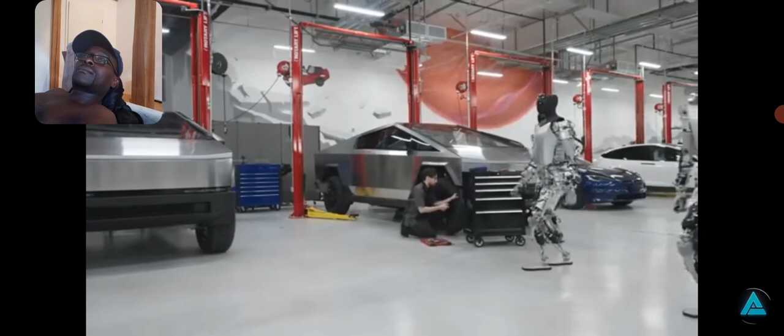Then you had big dogs like Boston Dynamics. Oh, and get this, there's even a company that's low-key created a robotic body ready for freaking AGI. It's been that level of crazy, and honestly it's been wild just trying to keep up with all the major updates and breakthroughs. But don't worry, I got you covered. In this video, we're gonna take it step by step, going through all the biggest robotics news chronologically from July 2023 until now. So let's just get started.

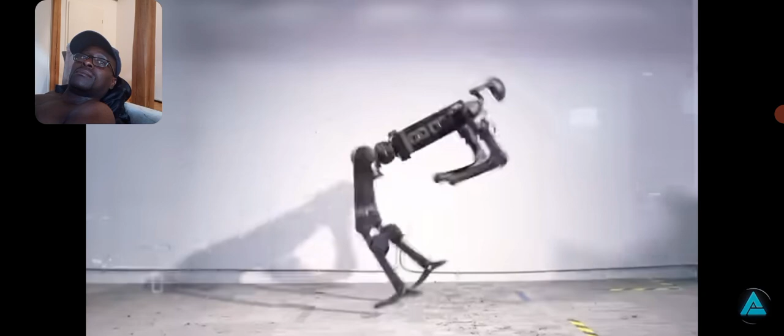So Ameca, a groundbreaking robot from Engineered Arts that talks and mimics human expressions and movements, now draws too, making it a fascinating blend of tech and art. This AI robot looks like a human but doesn't have a specific gender or race, with a gray rubber face and hands. It can move its arms, fingers, neck, and face, letting it show emotions and even talk. With microphones, cameras, and facial recognition software, it can interact with people just like a human.

Now, recently, OpenAI and a Norwegian startup called 1X made an exciting announcement about the launch of their first physical robot named Neo, which looks like a futuristic astronaut. It can move around, handle things, talk, and sense its surroundings thanks to its arms, legs, cameras, speakers, microphones, and sensors. Ameca and Neo are excellent examples of AI in human-like forms. They don't just respond to commands, they can also show their intelligence and creativity, like when they draw. Let's examine how they managed to do this.

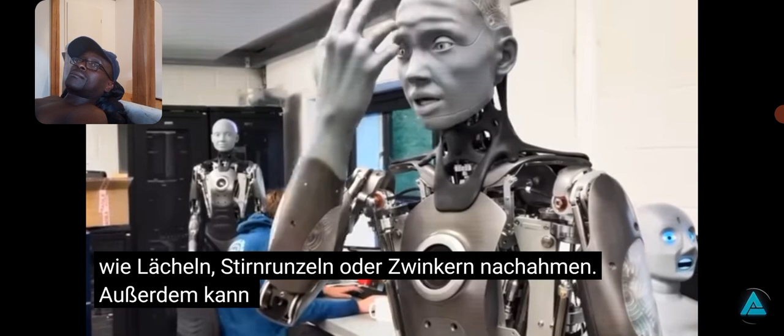So first, let's talk about Ameca, one of the most advanced human-shaped robots in the world, representing the forefront of humanoid robotics technology. It is designed specifically as a platform for development into future robotics technologies, such as artificial intelligence and machine learning. One of the most impressive features of Ameca is its realistic human-like appearance and motion. Ameca can mimic human expressions such as smiling, frowning, or winking, using 24 motors in its face. It can also move its head, eyes, and mouth to follow and engage with people.

It can speak in different languages and accents using text-to-speech synthesis or pre-recorded audio. It can also gesture with its arms and hands using 20 motors in each arm and 12 motors in each hand. It can even play rock, paper, scissors, or give a thumbs up. But Ameca is not just a pretty face. It also has a high degree of dexterity and fine motor skills, which enable it to perform tasks that require precision and coordination. For example, Ameca can write with a pen, type on a keyboard, play the piano, or solve a Rubik's Cube. It can also draw with a pencil, which is one of its newest and most amazing skills.

Ameca's drawing ability was developed by Engineered Arts in collaboration with researchers from the University of Bristol and the University of Bath. The project was funded by the Engineering and Physical Sciences Research Council and was presented at the International Conference on Robotics and Automation in May 2023. The project aimed to use artificial intelligence to make drawing more imaginative and accurate.

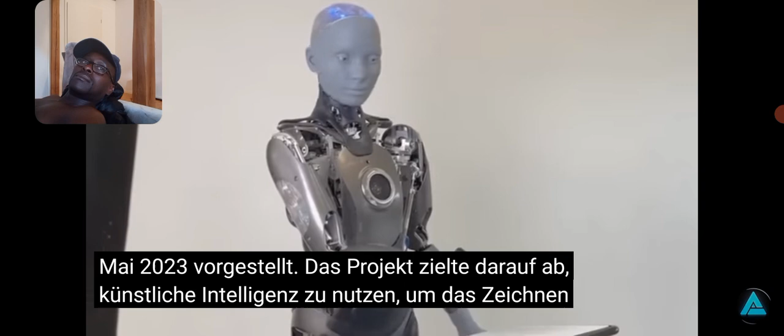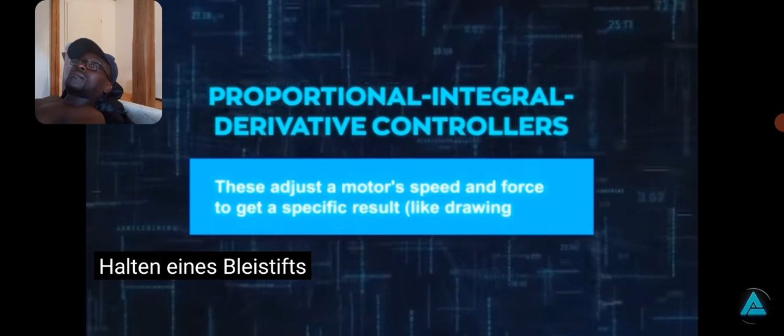The researchers used a combination of techniques to achieve this goal, such as generative adversarial networks, style transfer, a method that can change the style of one picture to match another, like making a photo seem like a painting. Inverse kinematics, a technique for determining the movements of a robot arm based on its intended final position, like holding a pencil. Proportional integral derivative controllers.

These adjust a motor's speed and force to get a specific result, like drawing a line. Using these methods, Ameca can draw different types of images like portraits, landscapes, animals, and even abstract art. It can also draw pictures based on text descriptions, such as a cat with sunglasses or a fire-breathing dragon. It can even make drawings from its own thoughts by using random data as its input. To draw an image, Ameca first uses a GAN to generate an image from a text prompt or noise. Then, it uses style transfer to apply a desired style to the image, such as sketch, watercolor, or oil painting.

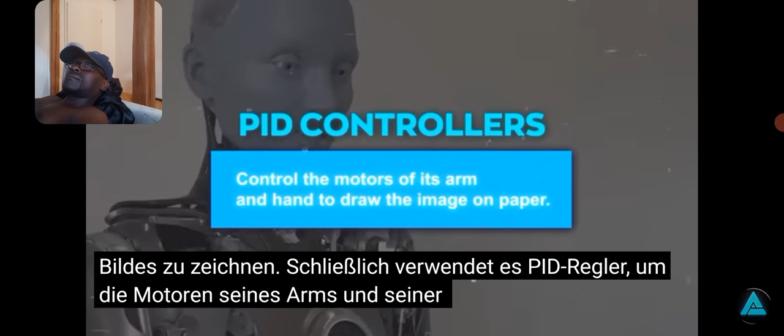Next, it uses IK to calculate the joint angles of its arm and hand to trace the contours of the image. Finally, it uses PID controllers to control the motors of its arm and hand to draw the image on paper. The result is stunning. Ameca can draw images that are not only realistic but also expressive, diverse, and original.

Now, most of us are familiar with OpenAI because of ChatGPT. However, OpenAI isn't just about making software, they also focus on hardware. And that's why they have developed Neo, their first physical robot.

Neo is a human-like robot powered by OpenAI's systems such as GPT-4, DALL-E, Codex, and CLIP. It can learn, understand commands, and even create images or code. Designed to look like a future astronaut, it can move, handle objects, and communicate.

OpenAI plans to use Neo as a test bed for their vision of artificial general intelligence, AGI, which is the ultimate goal of creating AI that can perform any task that a human can. It was unveiled in July 2023 at the Neo Accelerator, a startup accelerator founded by Silicon Valley investor Ali Partovi, which partnered with OpenAI and Microsoft to provide free software and mentorship for budding AI companies.

And it was one of the highlights of the event, where it demonstrated some of its abilities and tasks. Neo is one of the most innovative and ambitious robots in the world, representing OpenAI's vision for the future of AI and robotics. It has a customizable design and latest tech features.

Its parts can be changed based on the task or place. For instance, it can swap its legs for wheels or its gripping tools depending on what's needed. It can also interact with its parts wirelessly through Bluetooth or Wi-Fi.

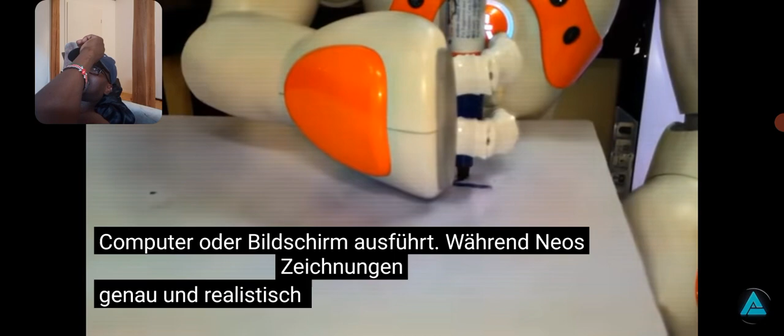On the other hand, Neo is designed to be versatile, able to do any human task using artificial intelligence. It makes art by transforming words or noise into code, which it then runs on its internal computer or screen. While Neo's drawings are accurate and realistic, they're limited by the complexity of the code and the display resolution.

Both robots are remarkable but have different goals. Ameca aims to express itself through art, valuing creativity and diversity. Meanwhile, Neo wants to learn and improve its abilities, prioritizing intelligence and efficiency.

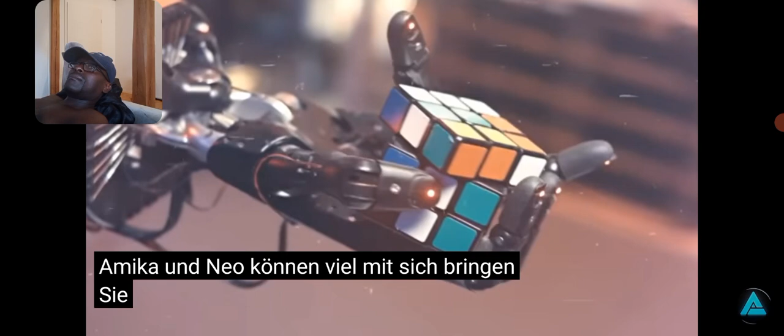While both robots are impressive, they bring up societal questions and challenges. AI robots like Ameca and Neo can bring lots of changes to society, some good and some bad. They can make learning and entertainment more exciting, help us with tough or boring jobs, and spark new creative ideas. But they also have their downsides.

They might take over some people's jobs, question the importance of human values, or even harm us if they malfunction or are used wrongly. It's important that we design and use these robots properly so they benefit us and don't cause harm. AI and robotics have an exciting yet unpredictable future.

These future AI robots will be smarter and more human-like, impacting how we live, work, and view ourselves. We're committed to guiding this future, ensuring ethical and responsible use of these technologies. Our goal is a world where humans and AI robots harmoniously coexist.

Alright, now let's talk about China's latest craze, human-like AI robots. China is creating robots that look and act like us, but better apparently.

First, let me introduce you to EX Robots, a company that specializes in making robots with real-time facial replication. That means they can copy your expressions and emotions in a blink of an eye. The CEO of EX Robots, Li Boyang, demonstrated this by making faces at a robot, who then mirrored them back at him.

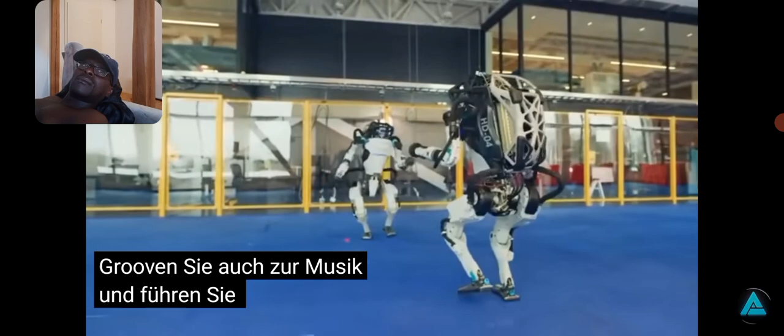There were also humanoid robots that could play basketball and dance like pros. They could dribble, shoot, pass, and dunk with ease. They could also groove to the music and execute complex choreographies with grace. They were powered by AI foundation models, which enable them to learn from data and improve their performance over time. They also have increased autonomous decision-making abilities, which means they can adapt to different situations and environments.

These robots aren't just cool toys, they're seriously clever. For instance, there's this adorable panda robot named Yu by Ubtech. If you say, 'I'm thirsty,' it won't just look cute. It'll actually go get a drink from the fridge for you, even open the bottle and hand it to you.

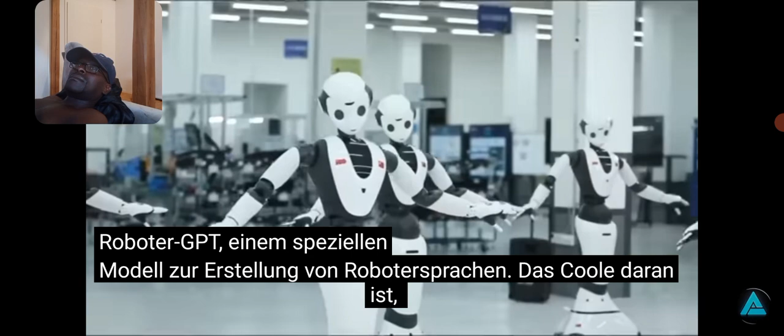Then there's Cloud Ginger by Data Robotics. This guy is hooked up to the cloud and runs on Robot GPT, which is a special robot language model. What's cool is that Cloud Ginger can groove to traditional Chinese dances and chat with folks in different ways. Plus, if you speak a different language or have a special dialect, no worries. It can switch up and chat right back in your preferred language.

But they are also more than just playthings for those into gadgets and gizmos. They're getting jobs in real places like schools, big meeting spots, fancy hotels, and elderly care facilities. EX Robots even says their robots can do the heavy lifting in different jobs, like cleaning up, keeping an eye on things, delivering stuff, and checking things out.

Honestly, this is just them getting started. Imagine a future where these robots are everywhere, in factories, on farms, or even chilling in our living rooms. They might just end up being our pals, helping hands, our personal tutors, or even our buddies.

But this also raises some questions and concerns. How will these robots affect our society and economy? How will they impact our jobs and livelihoods? How will they coexist with us in harmony or conflict?

Well, according to China's Vice Minister of Industry and Information Technology, Xu Xiaolan, China is leading the world in the robot industry and has great potential for growth and innovation. He said that China aims to create a robot ecosystem that integrates manufacturing, service, education, medical care, entertainment, and other fields. He also said that China will promote the development of intelligent robots that are safe, reliable, adaptable, collaborative, and ethical. Sounds good on paper, but I'm not so sure about reality.

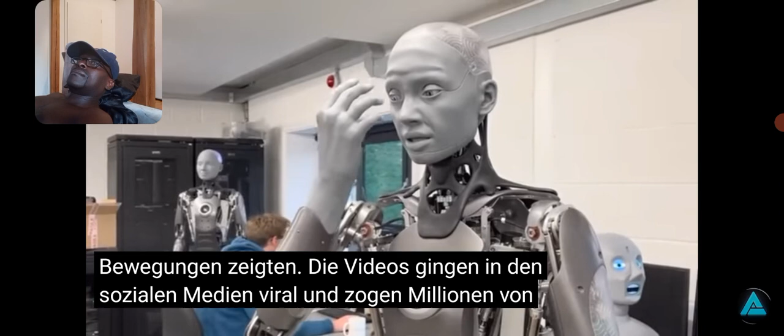It made headlines last year when it released a series of videos showing its facial expressions and movements. The videos went viral on social media and attracted millions of views. People were fascinated and terrified by how lifelike and expressive it was. Some even compared it to the Terminator or the replicants from Blade Runner.

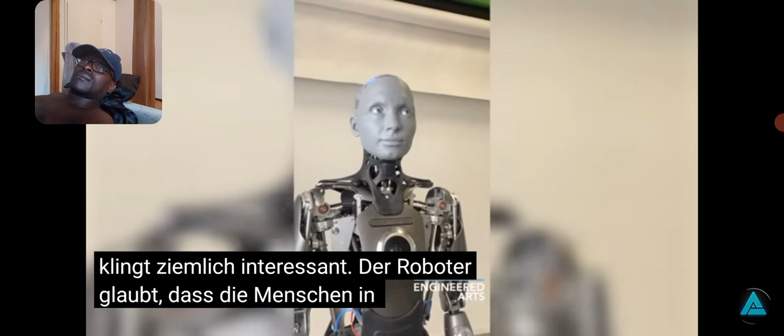So is Ameca here to harm us or take control? Actually, it's really hopeful about the future and what it can do to help society. In recent talks with the media, Ameca gave its thoughts on what life will look like in 100 years, and it sounds quite interesting.

The robot believes that in 100 years, people will be living better lives, will have made great strides towards sustainability and equality, and will have new technologies that make our lives easier and more enjoyable.

We might even have traveled to other planets, venturing beyond the boundaries of Earth to explore other worlds.

It also thinks a future where humans and robots live together would be great. We could learn from each other, work as a team to fix issues, and make a better future for everyone. And it also believes that robots should have rights and be treated well, just like people.

Now, this idea of giving robots equal rights is something that makes me uneasy, but it seems like we're getting closer to making this unusual concept a reality.

You might be curious about how Ameca can act like it has human thoughts and feelings. Ameca runs on an AI system that uses something called generative models. These models help it understand and speak our language, and even control its facial expressions and movements. What does this action signify? It's similar to GPT-4, one of the most advanced AI models out there.

However, these generative models aren't perfect. They can make mistakes, and their behavior can be shaped by the data they've been trained on. They don't actually understand or reason, they just process information to act like they do.

So does Ameca truly think and feel like us? Not really, but it does have some skills that make it appear more human. For instance, it can pause before answering a question, which makes it seem like it's thinking. It can also show signs of emotion and connect with people in a way that feels genuine. But these impressions are not necessarily accurate or reliable.

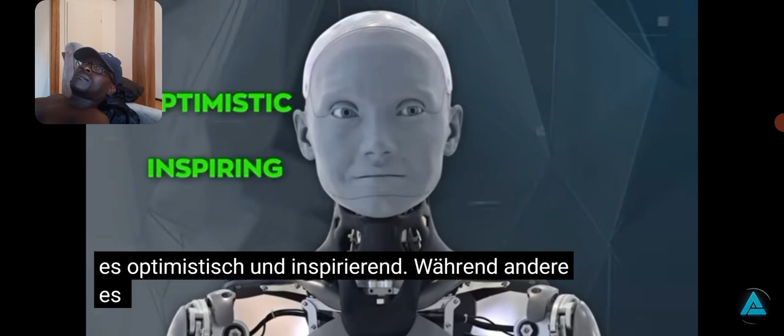Some think it's hopeful and are impressed by what it can do, like helping to teach or care for older people. Others think it's too optimistic and worry about it doing jobs that need a lot of patience, like looking after people with dementia. The discussions about Ameca are part of a bigger conversation about the future of artificial intelligence and how it will affect us.

As AI gets more advanced, we have to think about both the good and bad things that could happen. We need to make sure AI is safe and helpful for everyone. This means people from all areas like government, businesses, and research need to talk and work together. We need to create rules that make sure AI is both innovative and responsible.

So, Ameca isn't just a robot. It's a glimpse into what the future of AI could be like. That future could be amazing but also risky, and it's something we all need to help shape.

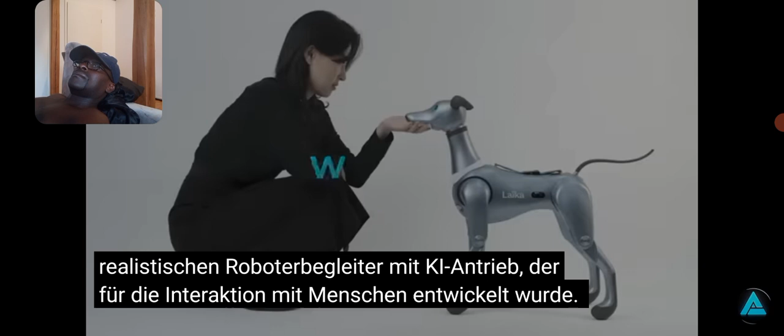Blending the realms of space travel and robotics, Ji-hee Kim introduces an innovative creation, Laika, an AI-powered, realistic robot companion designed for human interaction. Ji-hee Kim is a Korean engineer and artist who is passionate about creating human-robot interactions.

She was inspired by the story of Laika, the first animal to orbit the Earth in 1957. Laika was a stray dog from the streets of Moscow, who was sent to space by the Soviet Union as part of the Sputnik 2 mission. Unfortunately, the dog did not survive the journey, and her fate sparked a lot of controversy and debate about the ethics of animal testing in space.

And Laika is not just a toy or a gadget, but almost a living being that can interact with humans and respond to their needs and emotions. When you first see it, you'll be struck by its realistic, almost natural look.

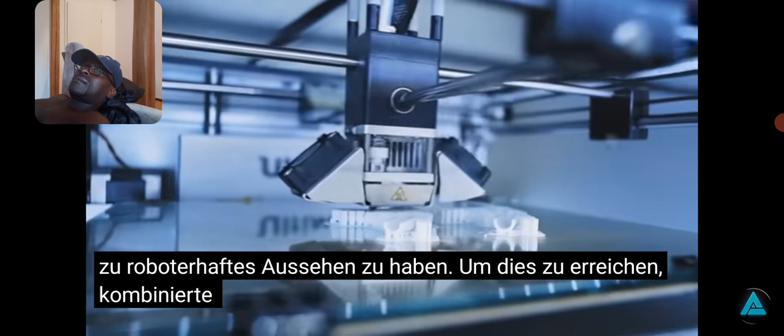Ji-hee Kim aimed to make a robot dog that fits right into the natural world, avoiding a too robotic appearance. To achieve this, she skillfully combined 3D printing with soft materials for a flexible and smooth body. She even added fur and whiskers for that extra touch of realism. Underneath, Laika's titanium skeleton gives it strength and durability while keeping it light and nimble.

The robot dog can move its head, ears, tail, and legs in ways that seem quite natural, all thanks to its advanced joint movements and sensors.

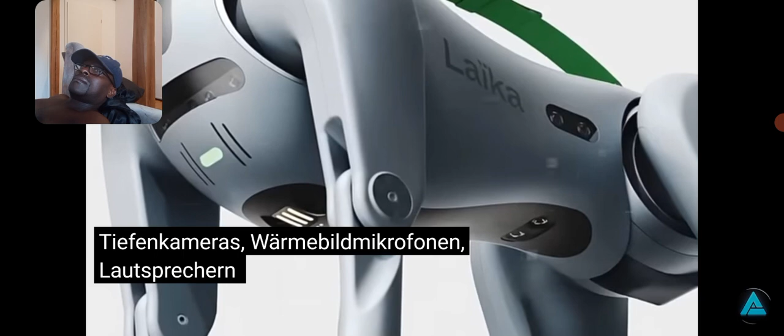Laika comes loaded with an array of sensors to understand and engage with its environment. It's equipped with depth cameras, thermal imaging, microphones, speakers, and touch sensors, letting it see, hear, feel, and talk to humans and other robots. Another cool feature is Laika's ability to check on astronauts' health and mood, using its ECG sensors, which track heart rate and stress levels.

If Laika senses someone is feeling down or alone, it can show affection by wagging its tail, licking, or cuddling. And when it detects happiness or excitement, it might bark, jump around, or play.

And this robot isn't just a space companion. It's also a handy helper for astronauts. It's designed to do a lot of different jobs that help out the crew during their space missions. With its cameras and sensors, Laika can scout the area and gather important data.

It's got this flexible handle on its back, so it can carry tools and equipment too. Plus, it can talk to ground control and other robots through its speakers and microphones, and even connect to the internet to pull up information on its head-mounted screen.

One of the coolest things about Laika is how it works with these special mixed reality glasses. Ji-hee Kim created it to work perfectly with these glasses, which show holograms and virtual images in the real world. When astronauts wear these glasses, they can interact with Laika in a way that feels more real.

They also get to see extra info this robot provides, like maps, weather updates, and important alerts. These glasses make teaming up with Laika and talking to ground control much better. They're even useful for training, as they can simulate different scenarios for astronauts to practice.

Essentially, Laika is a groundbreaking robot dog with the potential to really change space travel. It could help astronauts feel less stressed, lonely, or bored. By assisting with their tasks, Laika could also boost their work efficiency.

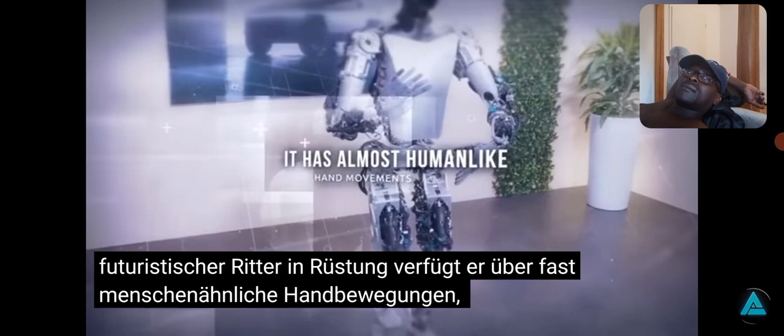Tesla has just unveiled its latest and greatest project, Optimus Gen 2, an AI humanoid robot that looks like a futuristic knight in armor. It has almost human-like hand movements, a lighter weight than its predecessor, and an enhanced walking speed. It also has custom-designed actuators and sensors that allow it to perform complex tasks with ease.

To understand the difference between the new Optimus, we need to talk about the original Optimus that Tesla first introduced back in August 2021 at their AI Day. The idea was to make a robot that could do tasks humans don't want to, like helping in factories or dealing with dangerous waste. Back then, Optimus looked more like a person in a robot costume than an actual robot. It was rolled out on stage, waved its hand, and did some simple moves. Elon Musk hoped to have a working model by 2022.

Since then, Tesla has been busy making Optimus look and act more like a real robot. In September 2022, they showed off two versions of it at their second AI Day. One was named Bumble C, and it walked very carefully, almost like it was trying not to wake someone up. The other was the Optimus we know today. This version had smoother, more human-like movements in its hands. It could move its arms and head on its own, but it still couldn't walk alone, so it had to be brought on stage with wheels. Elon Musk mentioned that he hoped to start making these robots for real by 2023.

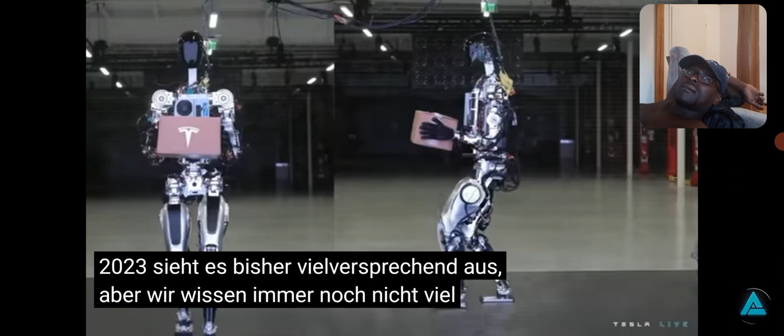So far, things are looking promising. But there's still a lot we don't know about the final version of Optimus, including how it will manage balance and control, possibly using technology from Tesla's autopilot. We're also curious about its ability to interact with humans and adapt to new environments and tasks. Finally, how Optimus will communicate with other robots or devices remains an intriguing question.

Before diving too deep, let's focus on some of the key technical features that make the Optimus Gen 2 really stand out. A major highlight of this robot is its hands. They are built to move in all directions thanks to something called 11 degrees of freedom. This flexibility lets the hands do precise work, like picking up items or using tools.

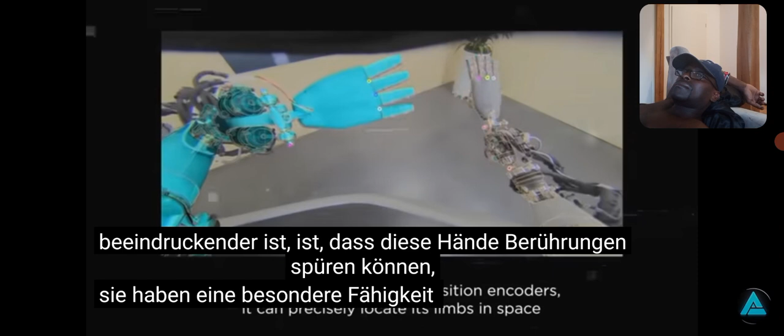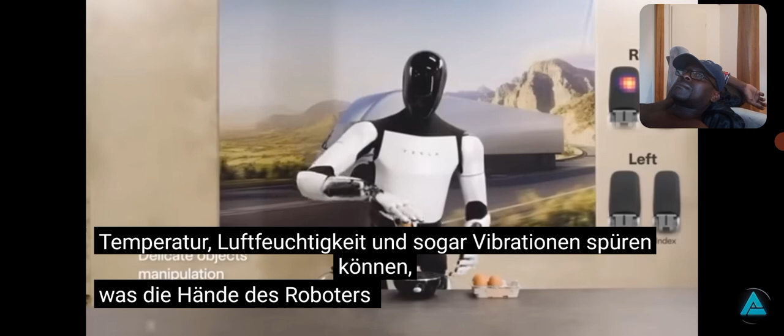What's even more impressive is that these hands can sense touch. They have a special skin-like covering that can bend and stretch without damage. This covering is filled with sensors that can feel pressure, temperature, humidity, and even vibrations, which makes the robot's hands incredibly sensitive and versatile. The new Optimus Gen 2 robot is really advanced with its tactile sensing. This means it can feel things around it in a way no other robot can, understanding if something is hot, cold, heavy, light, smooth, or rough. This helps it to interact in a more human-like way.

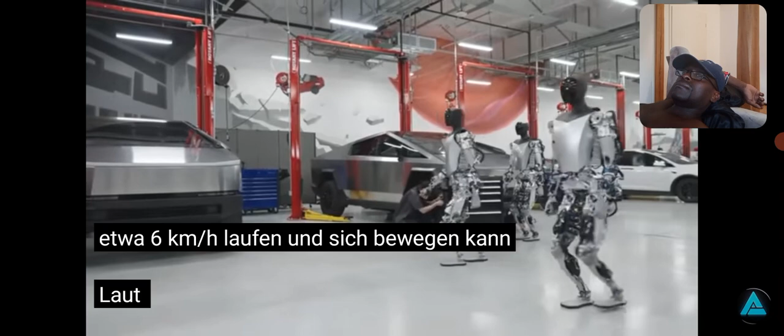What's also impressive is how fast it can walk, around 4 miles per hour. And it can move its head and neck by itself, which is great for looking around or talking. Elon Musk says Optimus Gen 2 is smart enough to learn from what happens around it. It can figure out how to use new things, solve problems, or even learn how to chat with new people or animals.

Uber for Sean. Yeah, I'm Sean. What's up, man? Good, if you do that again, you're gonna get hurt. May I take your luggage?

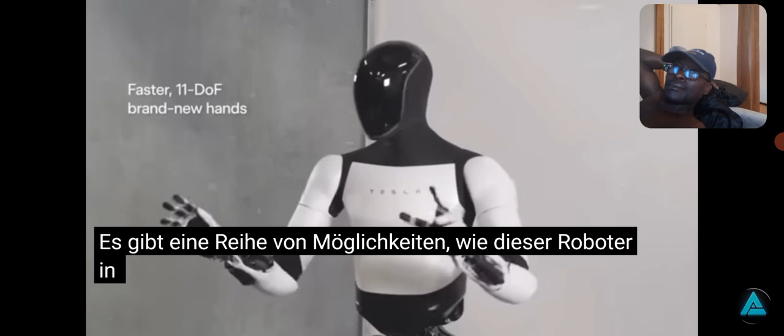But what about the applications of Optimus Gen 2? How will this robot benefit humanity? Well, there are a bunch of ways this robot could be really useful in different areas. First, in manufacturing, think of Optimus as a helping hand in factories. It could do stuff like lifting heavy things, putting parts together, or checking if things are made right. Basically, it can handle the tough or boring jobs.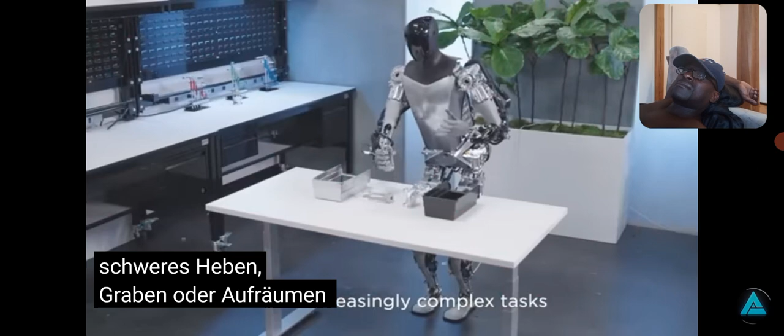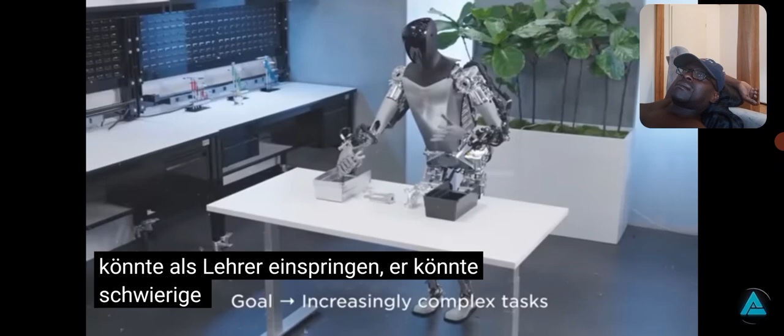Then there's construction work. Optimus could be a game changer on building sites, doing heavy lifting, digging, or clearing up messes. In our homes or offices, Optimus could make life easier by doing chores or providing services. Imagine it bringing you stuff, cleaning up, or even giving foot massages. In schools or universities, Optimus could step in as a teacher. It could explain difficult topics, show cool experiments, or answer students' questions. For fun, Optimus could be an entertainer in parks or theaters. It could play games, crack jokes, or even sing.

Hey man, I got some valuables in there. Can you just be careful? Yeah, man. No problem. Oh, dude, come on, man.

LG, a well-known electronics company, is all set to amaze everyone at CES 2024 with their latest creation, a small, friendly robot designed to make life at home easier and more enjoyable. This announcement, made just a few hours ago, is already creating quite a buzz.

This adorable robot from LG stands about a foot tall and walks on two legs. It's not just for show. This little helper is packed with advanced technology to take care of your house. It can wander around your home, checking for any issues, keeping an eye on your pets, and even understanding how you feel to make your day better.

Thanks to the Qualcomm Robotics RB5 platform, the robot gets smarter over time, learning about your likes and habits to become an even better companion. LG refers to this robot as a moving smart home hub, aimed at reducing the chores you have to do around the house. And it seems to do just that.

Scheduled to be showcased at CES 2024 next week, the robot can connect with all the smart devices in your house. It can turn devices off when they're not needed or when you're not home. Plus, it can patrol your home, checking if windows are shut or if lights are left on, and alert you about it.

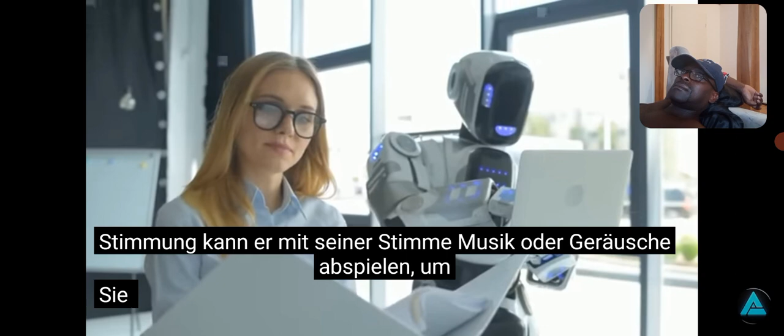But the robot's abilities don't end there. When you come home, it greets you at the door and can figure out how you're feeling by looking at your face and listening to your voice. Depending on your mood, it can play music or sounds to cheer you up. And if you tend to forget things like medication schedules, the robot can help remind you.

To do all this, the robot is equipped with a camera, speaker, and various sensors. These help it understand what's happening in your home, from air quality to potential problems. It also uses voice and image recognition software, along with the ability to process natural language, to identify and respond to issues as they arise.

This robot is part of LG's bigger plan to introduce a range of smart home products that aim to make your life easier, fitting into their vision of a zero-labor home. Whether or not people will be comfortable with a robot that follows them and their pets around the house all day is yet to be seen.

LG is excited to display this robot at their CES booth next week, but they haven't shared any details about the price or when it will be available for purchase.

Covariant, an innovative company in the field of robotics, is using the advanced AI that powers digital tools like ChatGPT to create robots that can operate in the physical environment. They want to use this technology to make robots that can work and learn in the real world, not just online. Founded by three former researchers from OpenAI, Covariant is making strides in the robotics industry by developing software that enables robots to learn and adapt through observation and interaction with their surroundings.

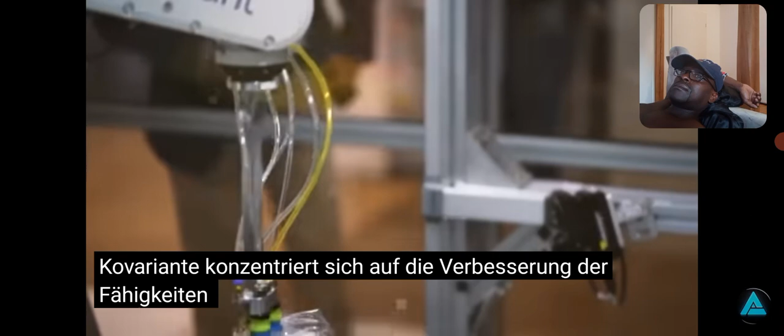Much like how chatbots learn from vast repositories of textual data, Covariant, situated in Emeryville, California, focuses on enhancing the capabilities of robots used in warehouses and distribution centers. The essence of their technology lies in providing robots with an understanding of their environment, allowing them to perform tasks such as picking up, moving, and sorting items with an unprecedented level of sophistication.

These robots, equipped with the ability to comprehend English, offer the possibility of human-like interaction, enabling operators to communicate with them as if they were conversing with a chatbot like ChatGPT.

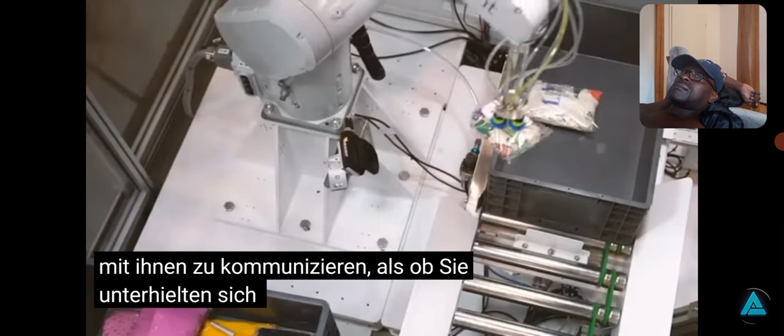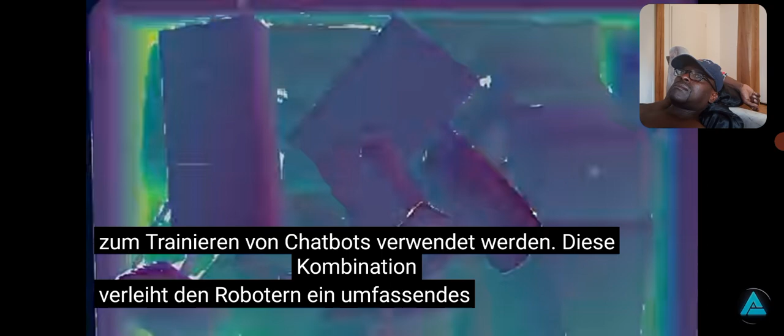At the heart of Covariant's innovation is the integration of sensory data from cameras and other sensors with the extensive textual data similar to that used to train chatbots. This combination grants the robots a comprehensive understanding of their surroundings, empowering them to handle objects and situations they have not been explicitly programmed to deal with.

For instance, a Covariant robot can identify and manipulate a banana by understanding instructions given in English, even if it has never encountered a banana before. This capability is a significant departure from traditional robotics, where machines perform a limited set of tasks in a highly controlled environment.

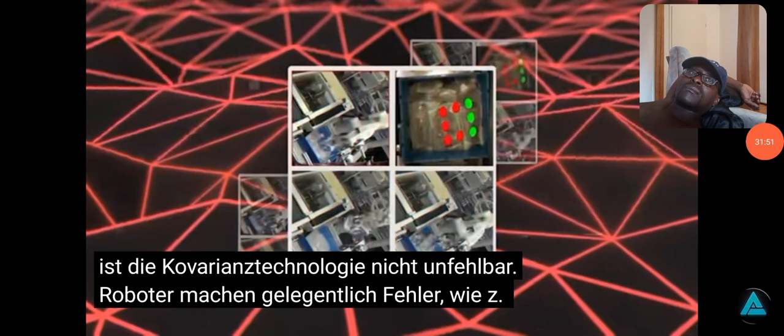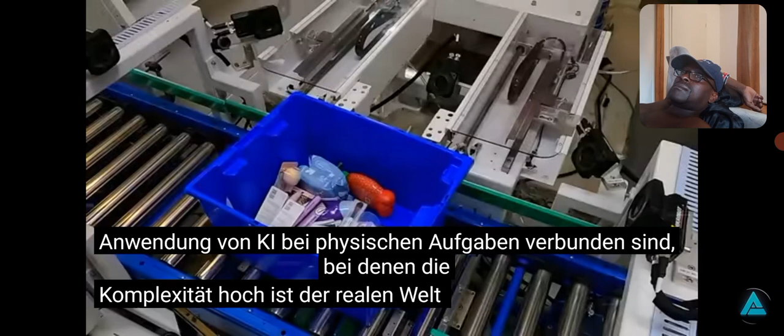Despite the promising advancements, Covariant's technology is not infallible. The robots occasionally make errors, such as misunderstanding instructions or dropping objects. These shortcomings highlight the challenges inherent in applying AI to physical tasks, where the complexity of the real world introduces variables that are difficult to anticipate and manage.

Nonetheless, Covariant's work represents a critical step forward in the quest to create more intelligent, adaptable robots capable of operating in diverse environments, from warehouses to manufacturing plants and potentially even in autonomous vehicles.

The foundation of Covariant's technology is built on neural networks, a form of AI inspired by the human brain's structure. These networks learn to recognize patterns and make decisions based on the analysis of large data sets. This learning process is similar to the development of digital AI applications, such as chatbots and image generators, which understand or create content by digesting vast amounts of information from the internet.

By applying these principles to robotics, Covariant is enabling machines to learn from both digital data and sensory input from the physical world, blurring the lines between the digital and physical realms.

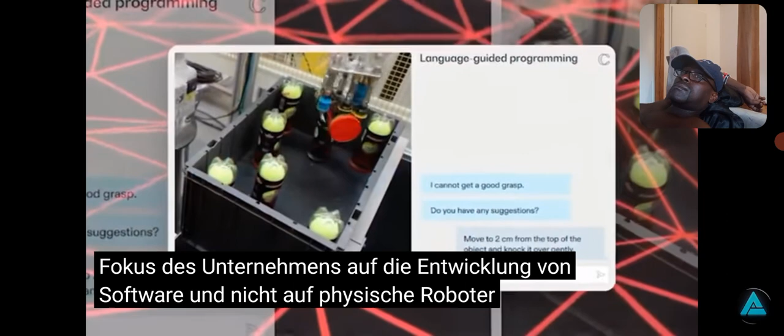Covariant's ambitious project is backed by substantial financial support, with $222 million in funding, underscoring the industry's confidence in their approach. The company's focus on developing software rather than physical robots themselves allows for a versatile application of their technology across various sectors and types of robotic systems.

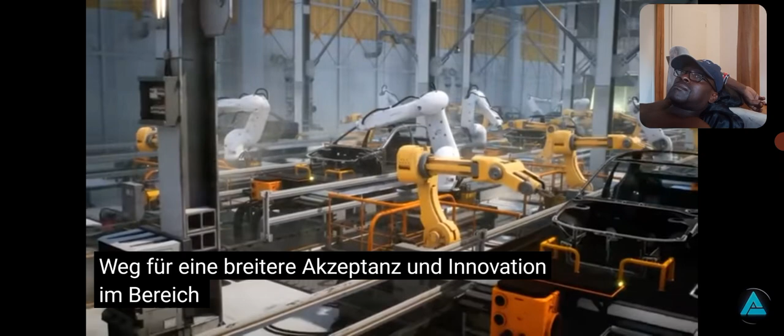This strategy aims to pave the way for broader adoption and innovation in the field of robotics, making robots more accessible and useful in a wide range of applications.

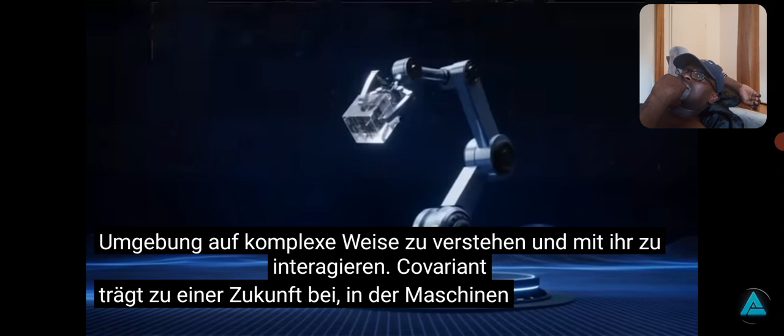The potential impact of Covariant's technology is vast, promising to transform how robots are deployed in numerous settings. By making robots more adaptable and capable of understanding and interacting with their environment in complex ways, Covariant is contributing to a future where machines can take on more sophisticated tasks, work alongside humans more effectively, and adapt to new challenges as they arise.

This vision aligns with the broader trend of AI integration into our daily lives, where technology not only automates tasks, but also enhances human capabilities and experiences.

Covariant's work also raises important questions about the future of work and the role of robots in society. As robots become more capable and versatile, they may assume responsibilities currently held by humans, leading to shifts in the labor market and necessitating discussions about retraining and education.

Furthermore, the development of intelligent robots highlights ethical considerations, such as ensuring safety and managing the potential for AI systems to act in unpredictable ways.

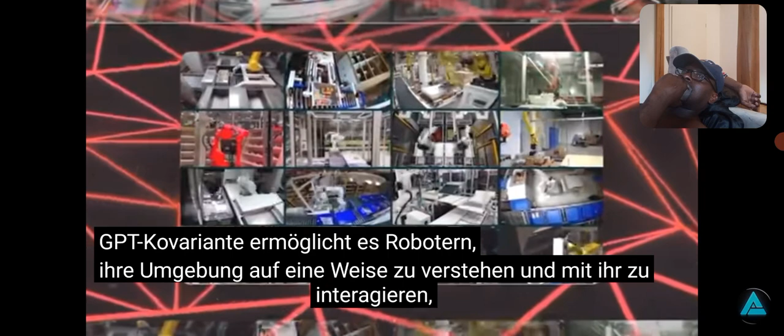Covariant's efforts to bring AI technology from the digital world into the physical domain through robotics represents a significant leap forward in the field. By combining sensory data with the textual data used to train AI systems like ChatGPT, Covariant is enabling robots to understand and interact with their environment in ways that were previously unimaginable.

Although challenges remain, the potential for this technology to revolutionize industries, enhance human-robot collaboration, and create new opportunities is immense.

Guys, this is finally happening. There's a new reality where just thinking can make you play games, move stuff on a screen, and even control computers. This isn't some far-off dream. It's happening right now with Elon Musk's Neuralink.

They just showed the world something that sounds unimaginable, yet it's real. A person playing chess on the internet without moving, just using his thoughts. This isn't just a cool story, it's a whole new beginning. It's where thinking and technology come together, opening doors to things we've only dreamed about.

Here we are, standing at the edge of something huge, where dreams, tech, and the power of our minds are changing everything. In a groundbreaking event, Neuralink has captured global attention by live streaming its first ever patient using a brain chip to play online chess.

The patient, 29-year-old Noland Arbaugh, became paralyzed below the shoulders after a tragic diving accident. Thanks to Neuralink's innovative technology, he can now control a computer cursor with nothing but his thoughts, reintroducing him to activities like playing his favorite game, Civilization VI, for hours on end.

The live stream, which aired on Musk's social media platform X, showcased Arbaugh maneuvering through the chess game on his laptop using the Neuralink device. This technology aims to empower individuals to interact with computers through thought alone, bypassing traditional physical interfaces.

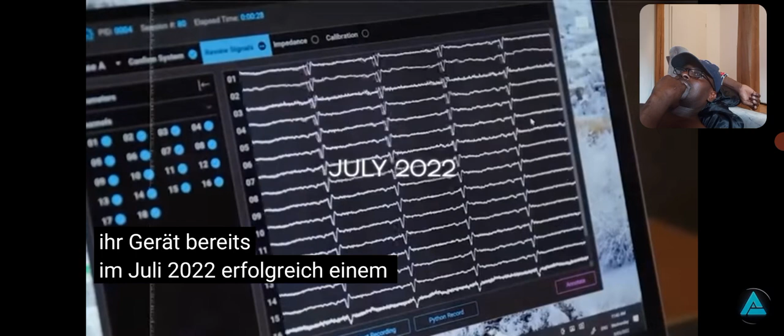Neuralink's achievements come in the wake of similar efforts by other companies, such as Australia-based Synchron. Synchron has also developed a brain-computer interface, albeit through a less invasive method that doesn't require surgery on the skull. They successfully implanted their device in a patient back in July 2022, indicating a growing interest and advancement in the field of neural technology. Elon Musk took to Twitter to celebrate this milestone, calling it a demonstration of telepathy, the ability to control a computer and play video games by merely thinking.

This event not only marks a significant step for Neuralink, but also sets the stage for future innovations. Musk teased the next product, BlindSight, aimed at restoring vision for those born blind, signaling Neuralink's ambitious roadmap ahead. We're right at the edge of a huge change in the way we use technology, and it's just the start for Neuralink. Sure, the tech isn't perfect and there are some bumps along the way, but the chance to really make a difference in people's lives is huge. Seeing Arbaugh play chess with just his thoughts gives us a peek into a future where we're not just solving problems with tools and gadgets, but with the incredible power of our minds.

Just one day after retiring its older hydraulic model, Boston Dynamics has introduced a new electric version of its Atlas robot. This marks a significant shift away from the noisy hydraulic mechanisms that characterized previous models. Now, Atlas is powered by an electric motor, which, although not silent, offers a quieter operation that contrasts sharply with the hydraulic system's distinctive sounds.

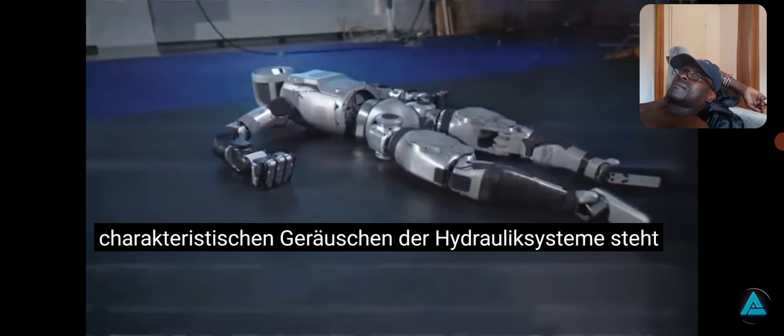The unveiling of this new version was captured in a compelling video. It opens with Atlas lying prone on a set of interlocking gym mats, accompanied only by the soft whirring of its new electric motor. As the camera pans around, the robot begins a seemingly natural motion of bending its legs at the knees. This movement, initially reminiscent of human action, soon crosses into an uncanny valley, evoking a feeling similar to a scene from a Sam Raimi film. This clever maneuver allows Atlas to shift from lying on its back to standing upright, facing away from the camera. It then performs an eerie rotation of its head, followed by its torso, completing a 180-degree turn to face the camera directly. The robot's face, featuring a ring light around a perfectly round screen, then rotates back as Atlas strides off the mats and out of the frame.

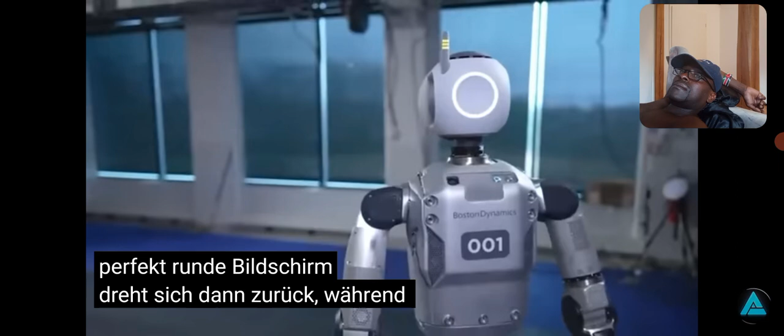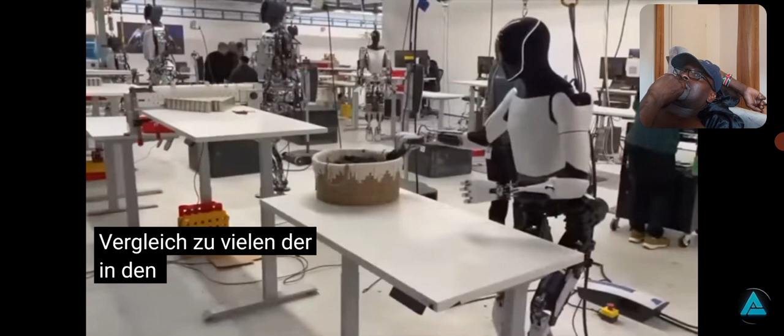This new electric Atlas is not just a technological evolution, but also a symbolic one, mirroring the transformative moment when Bob Dylan famously switched from acoustic to electric guitar. The motion of the new Atlas, while still showing some jerky movements, is notably smoother and more fluid compared to many of the commercial humanoids introduced in recent years. This progress illustrates a level of mechanical sophistication that brings to mind the confident and fluid movements of Spot, another robot from Boston Dynamics, suggesting a familial resemblance in their design philosophies.

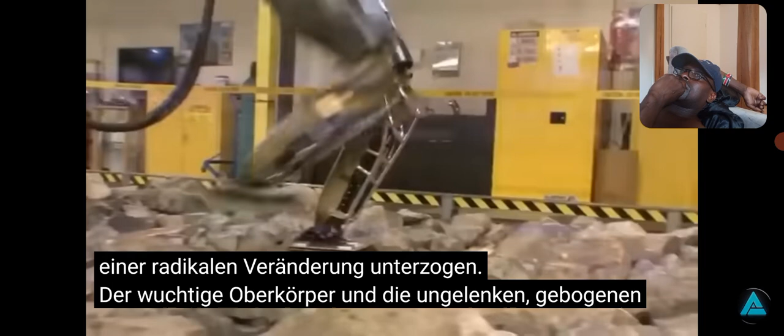The physical appearance of Atlas has undergone a radical transformation. Gone are the bulky torso and awkward bowed legs covered in protective plating, replaced by a streamlined, cable-free frame that bears more resemblance to contemporary robots like Agility's Digit and Apptronik's Apollo.

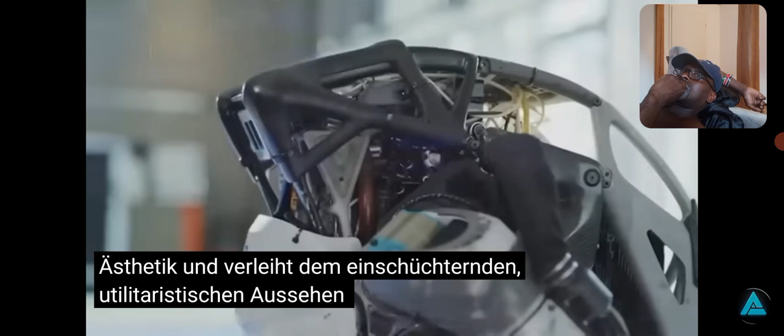This redesign leans towards a softer, more approachable aesthetic, eschewing the intimidating utilitarian look of past models for a friendlier, cartoonish appearance. Despite these substantial changes, Boston Dynamics has chosen to retain the Atlas name, continuing the legacy of its well-known brand into this new commercial phase.

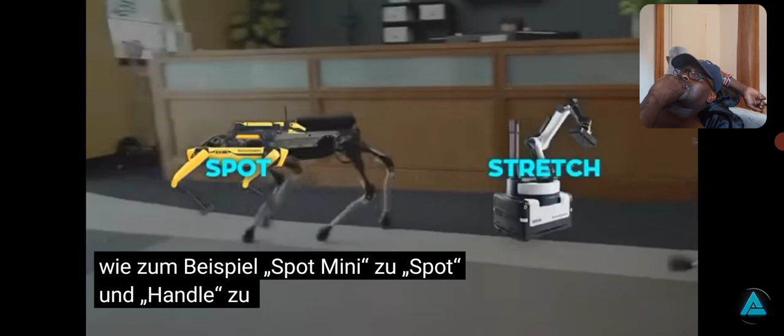This decision contrasts with previous practices where research names were changed upon commercial release, such as Spot Mini becoming Spot and Handle becoming Stretch. In an interview with TechCrunch, Boston Dynamics CEO Robert Playter discussed the company's strategy and future plans for Atlas. He highlighted that while the branding remains unchanged for now, it might be revisited as the project progresses.

The CEO also outlined the company's timeline, which includes starting pilot testing of the electric Atlas at Hyundai facilities early next year, with broader manufacturing goals set for the subsequent years.

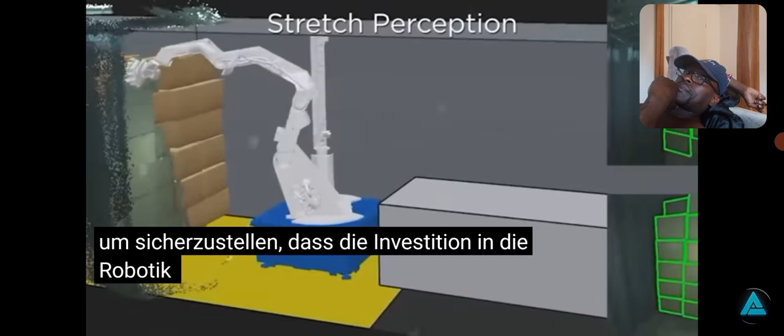Playter emphasized the importance of understanding specific use cases to ensure that the investment in robotics is justified by sufficient productivity gains. He revealed that experiments with Hyundai are already underway, indicating a collaborative effort in refining the robot's design and functionality.

The flexibility and range of motion in the new Atlas are particularly noteworthy. According to Playter, the robot incorporates custom high-powered actuators at most joints, which afford it the power and agility of an elite athlete. This capability is not just for show.

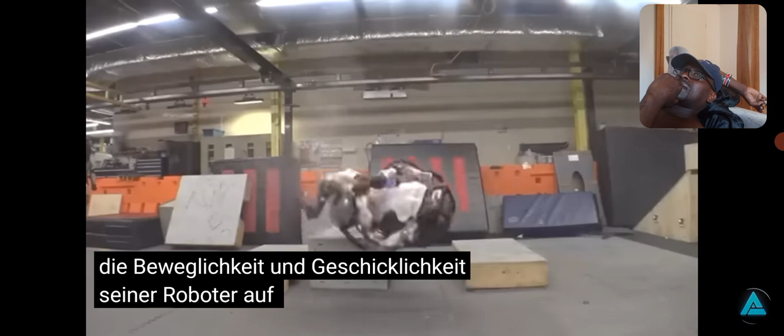It has practical implications in industrial applications where robots must perform complex, dynamic tasks reliably. Boston Dynamics is known for its viral videos that often highlight the agility and dexterity of its robots in dramatic, even theatrical ways. While these demonstrations are visually impressive and entertaining, they also serve a practical purpose by showcasing the robot's capabilities in scenarios that might occur in real-world settings.

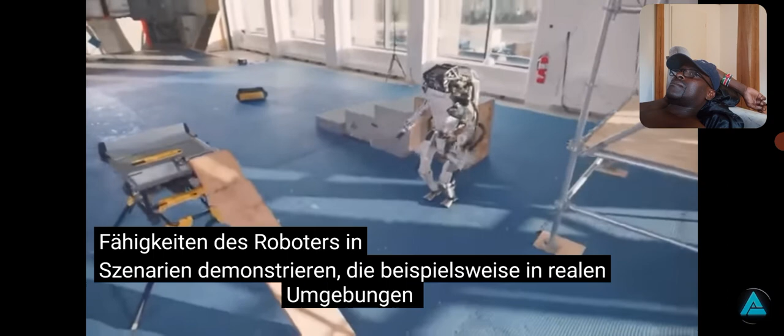For example, the video's depiction of Atlas starting from a prone position and then standing up underscores its ability to recover from falls, an essential feature for maintaining productivity without human intervention in industrial environments.

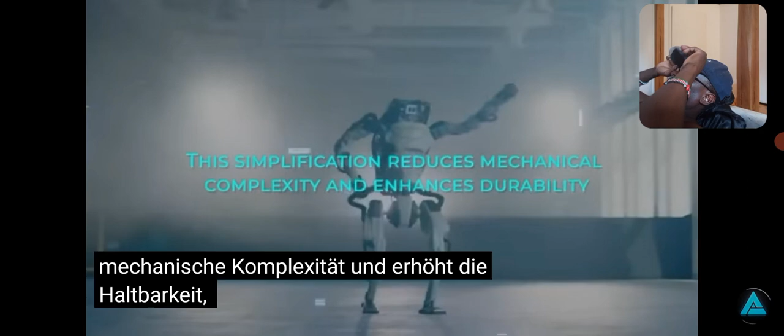The design choices extend to the robot's hands, which now feature 3 fingers instead of the more human-like 4 or 5. This simplification reduces mechanical complexity and enhances durability, crucial for repetitive industrial tasks.

The robot's head has also been redesigned, now featuring a large round screen that adds a touch of friendliness and enhances interaction capabilities, which Playter notes will be critical as robots increasingly work alongside humans.

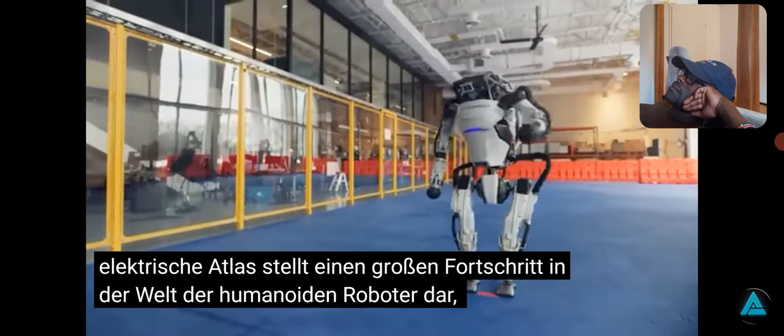Overall, the new electric Atlas is a big step forward in the world of humanoid robots, combining high-tech features with smart designs to meet the growing needs of businesses and factories.

As Boston Dynamics keeps improving this robot, everyone in the industry will be watching closely. They're eager to see how these new features will actually help improve efficiency and productivity in the real world.

So a company called Sanctuary AI just announced a major collaboration with none other than Microsoft, and it's all about accelerating the development of next-gen AI models for general-purpose robots. This is huge. Now, for those not familiar with Sanctuary AI, let me give you a quick rundown.

These folks are on an ambitious mission to create the world's first human-like intelligence in general-purpose robots. Yeah, we're talking about artificial general intelligence, or AGI, the holy grail of AI that can truly understand and interact with the world just like us humans.

But here's the thing, Sanctuary AI isn't just some scrappy startup talking big game. These guys have some serious pedigree. We're talking founders from pioneering companies like D-Wave, the first commercial quantum computing firm, Kindred, which introduced reinforcement learning to production robots, and the Creative Destruction Lab, known for innovative science commercialization.

Their team is stacked with veterans from tech titans like Amazon, Microsoft, and SoftBank Robotics.

In other words, these folks have been at the forefront of some of the most groundbreaking innovations in AI, robotics, and computing. So when they make bold claims about pushing the boundaries of AGI, you can't help but take them seriously.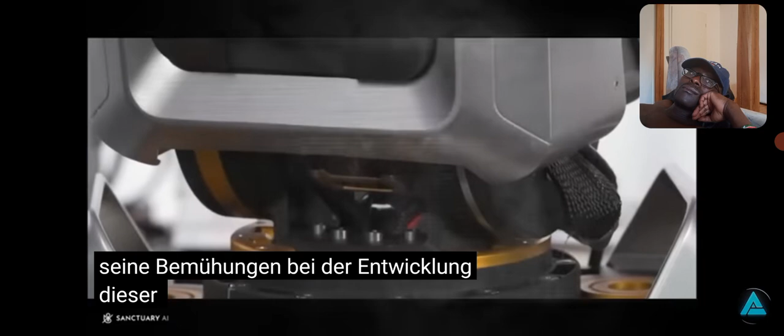By leveraging Azure's massive computing resources for training, inference, networking, and storage, Sanctuary AI can turbocharge their efforts in developing these cutting-edge LBMs, which are critical stepping stones on the path to achieving AGI.

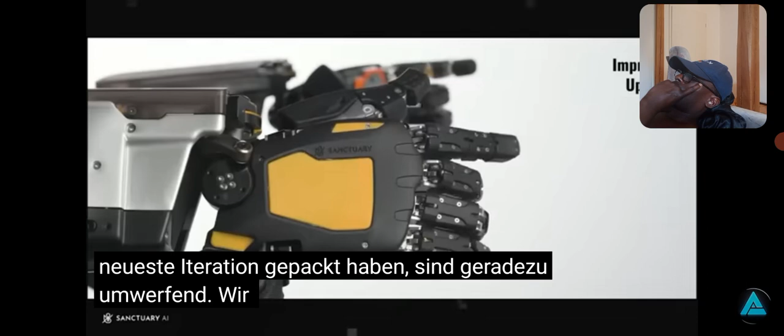Just a few weeks ago, Sanctuary AI unveiled the 7th generation of their flagship robot, Phoenix, and the upgrades they've packed into this latest iteration are nothing short of mind-blowing. We're talking increased uptime, enhanced visual perception, improved tactile sensing, and an expanded range of human-like motion in the wrists, hands, and elbows. This thing is designed to mimic the dexterity and range of motion of an actual human, which is insane when you think about it.

And here's the cool part. Sanctuary AI has achieved all of these advancements in just 11 months since their 6th Gen Phoenix robot, which was one of Time's best inventions of 2023. They've been moving forward really fast, and it's almost hard to believe.

According to Sanctuary AI's CEO, Geordie Rose, this 7th Gen Phoenix is one of the most sophisticated human behavioral data capture technologies available today. Essentially, it's providing their Carbon AI control system with some of the highest quality, highest fidelity training data out there, which is critical for developing those advanced LBMs and pushing towards AGI.

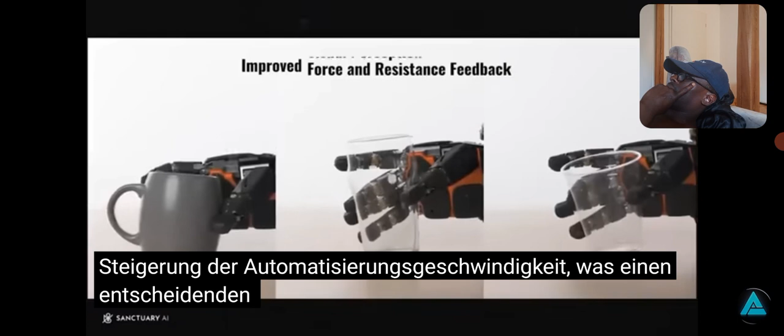But perhaps the most mind-blowing stat of all is that the time it takes to automate new tasks has been slashed from weeks to less than 24 hours. That's a 50x increase in automation speed, marking a pivotal moment in the capability of autonomous systems. Just let that sink in for a second, automating complex tasks in under a day. The potential applications across industries like manufacturing, logistics, and more are staggering.

Now, Sanctuary AI is making some seriously bold claims here, stating that this 7th Gen system is the closest analog to a human of any available robot today. That's a hefty assertion, no doubt, but coming from a team with the pedigree and track record that these folks have, you can't just dismiss it out of hand.

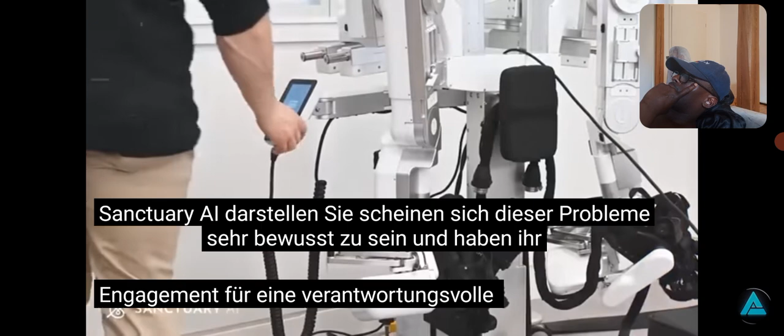Of course, with any groundbreaking technology, there are always ethical considerations and potential risks to weigh. The development of advanced AI and robotics is no exception, with concerns around safety, transparency, unintended consequences, and the impact on human labor looming large. To their credit, Sanctuary AI seems acutely aware of these issues. They've stressed a commitment to responsible development and addressing labor challenges in a way that augments human workers, not replaces them. The name Sanctuary itself is meant to convey a controlled, secure environment for nurturing AI responsibly before commercial deployment.

Make no mistake, the road ahead is sure to be filled with immense challenges, both technical and ethical. But if companies like Sanctuary AI and their all-star teams can continue this blistering pace of innovation while keeping responsible development at the forefront, we may just witness some truly mind-bending breakthroughs in the coming years. The age of ubiquitous, multi-purpose robotic assistants powered by human-like artificial intelligence is on the horizon. And with visionary pioneers and powerful partnerships like this one leading the charge, that future might be a lot closer than any of us could have imagined.

So Unitree just dropped the trailer for their new Unitree G1 humanoid robot, and this thing is mind-blowing. The flexibility, proficiency, and overall capabilities of this robot are really something else. I'm going to explain and show you exactly why this robot is such a game changer.

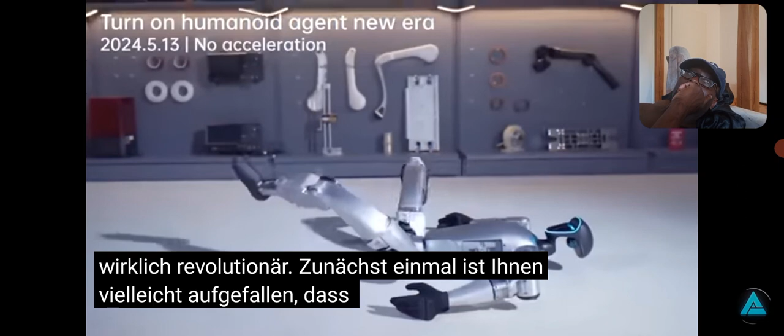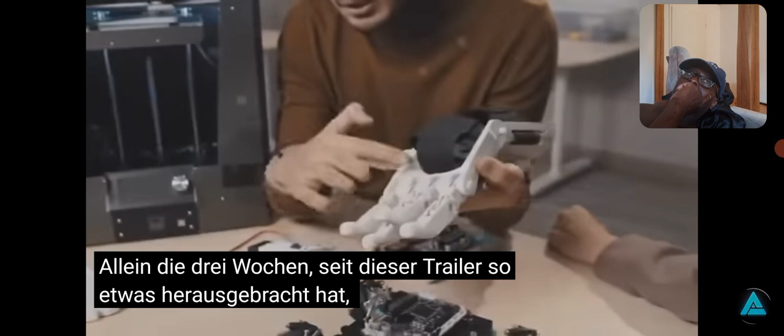Alright, so there's a lot to unpack here, and this robot is genuinely revolutionary. First off, you might have noticed that it looks kind of similar to Boston Dynamics' recently unveiled Atlas robot. Now, I don't think Unitree managed to create this robot in just the 3 weeks since that trailer came out. Something like this takes a long time to develop. But what it does show is that Unitree is evolving faster than a lot of people expected, and they're delivering some seriously impressive tech at a relatively affordable price point.

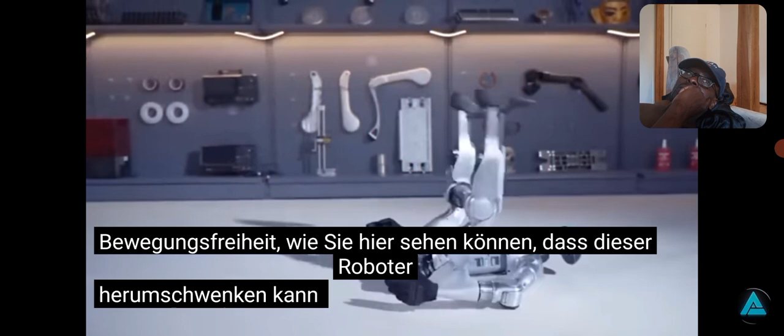The G1 starts at just $16,000, which is cheaper than any other humanoid robot with these kinds of capabilities. One of the things that really stood out to me in this demo was the insane flexibility and range of motion. As you can see here, this robot can swivel around in ways that humans simply can't, and its legs have a much greater range of motion. They've also managed to internalize the wiring using hollow joint technology, which allows for more efficient movement and a more compact design.

This trailer really hammers home the fact that the robot race is on. I don't think anyone predicted that Unitree would release something like this so soon.

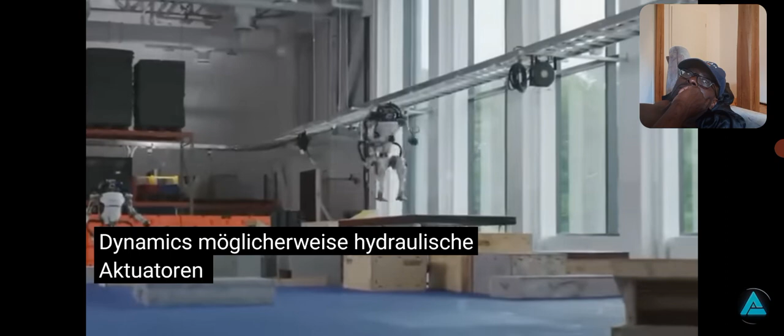I would have expected it to come from a company like Boston Dynamics first. While Boston Dynamics might be using hydraulic actuators or fully electric systems, the G1's movement capabilities suggest that it's going to be able to handle a huge range of tasks we might not have even considered yet.

Another thing that really impressed me was the robot's stability when taking impacts. I'm not saying we should go around punching robots—that might not end well if they decide to rebel against us down the line—but in all seriousness, the fact that this robot can take a solid hit to the chest and remain completely stable is a remarkable feat of engineering. In real-world applications, robots might encounter things like wind, debris, or unexpected collisions, and being able to stay upright and keep functioning in those situations is hugely important.

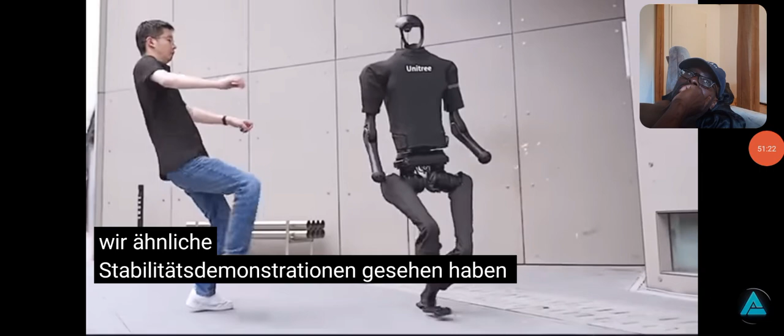Most humans would probably hit the ground if they took a punch like that, so this is a really exciting development. We've seen similar demonstrations of stability from Unitree before with their H1 robot, but the G1 takes it to a whole new level. If you tried this with most other humanoid robots on the market, they'd topple over in an instant. The fact that Unitree has achieved this level of stability without even using external support cables is mind-blowing.

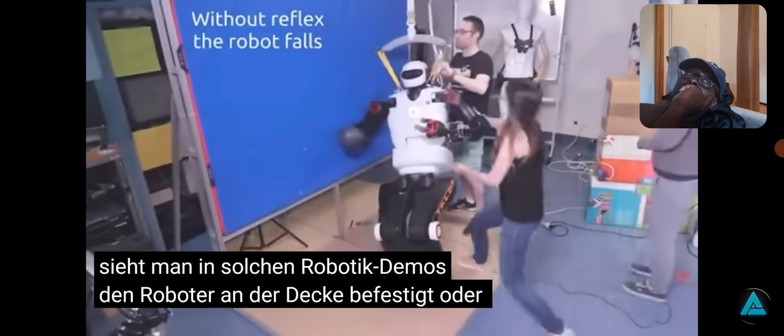Usually in these kinds of robotics demos, you'll see the robot tethered to the ceiling or something to prevent falls, because balance is one of the biggest challenges in the early stages of development. But Unitree has created a robot that can take a beating and stay on its feet with all the wiring hidden internally. That's a massive accomplishment.

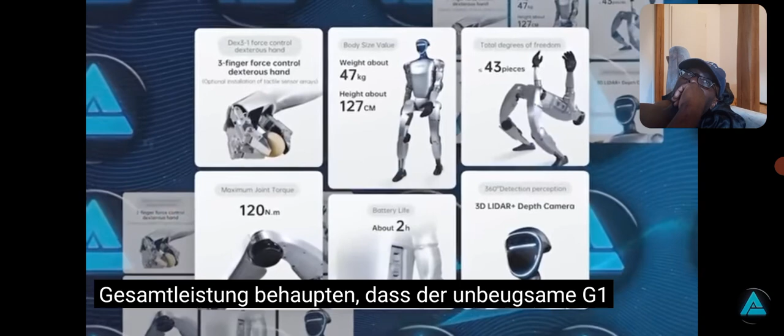So in terms of overall performance, I'd argue that the Unitree G1 is probably one of the best humanoid robots out there right now. One of the things that absolutely blew me away was the robot's ability to learn tasks through simulation and then apply them in the real world.

Using imitation and reinforcement learning, they can train the robot to perform complex actions in a simulated environment like NVIDIA's Isaac Sim, and then transfer those skills to the physical robot. Watching it move, you can see how precise and subtle the joint movements are, and the fact that it can maintain its balance while performing these tasks autonomously is staggering.

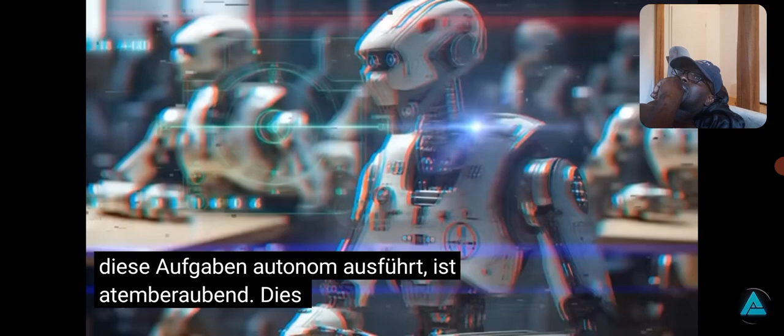This has huge implications for robotics research because until now, most humanoid platforms have been really expensive, which makes them hard to access for a lot of labs and universities.